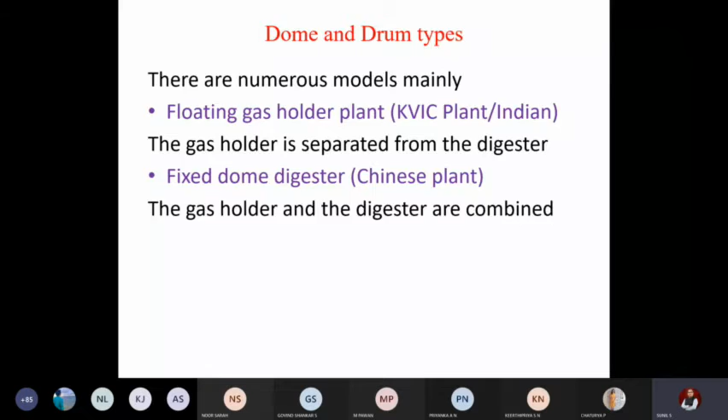So first we will start with the Indian design, also called floating drum. Take down a sketch. In most question papers, either Indian, Chinese, or single double stage, whatever we discussed, one question out of these three will definitely be there.

Please make it fast.

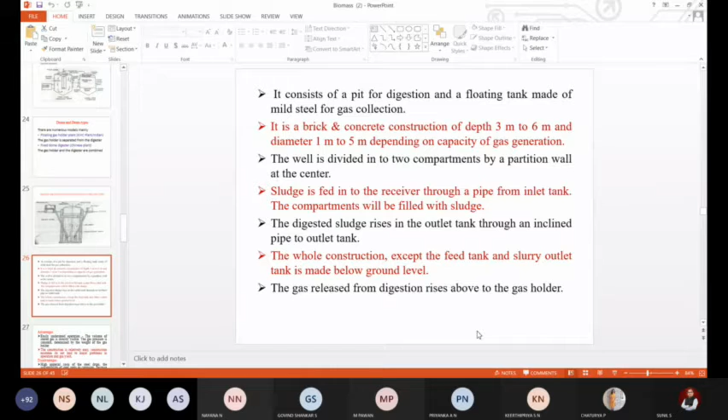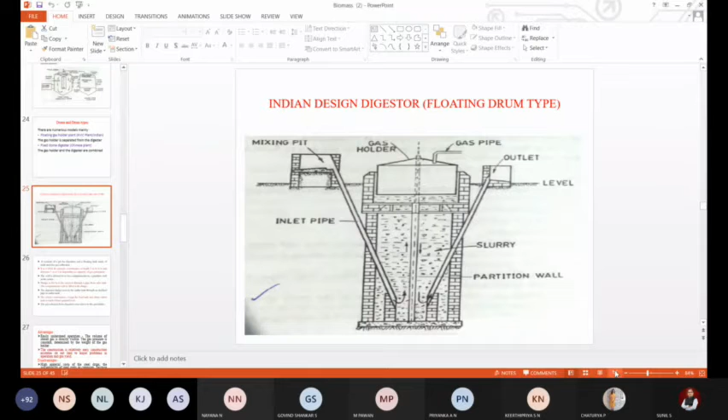So we'll start with the discussion. This is called the Indian design digester or floating drum type. Earlier, this design was very popular in India.

This is the mixing pit or the inlet pit, and this is the inlet pipe through which all the waste, sludge, slurry, etc. will be fed. This part is the inlet portion of the digester. All of this is brick construction. This is the second partition of the digester, and this part is the first partition, into which all the raw materials are fed.

It may be cow dung or any other crop residue, human waste, animal waste, domestic waste, etc., all fed along with suitable proportions of water, forming a slurry here. Over time, it gets digested. In the process of digestion, we have discussed the four sets of reactions that take place.

As the digestion process progresses, gas will be released and starts collecting in this drum, usually mild steel or another metal drum. As the gas starts filling, it will start floating, indicating the digestion process is getting completed. As digestion progresses, the slurry density reduces, so fresh slurry entering here, as shown by this arrow, pushes the digested slurry up so that it moves to the second compartment.

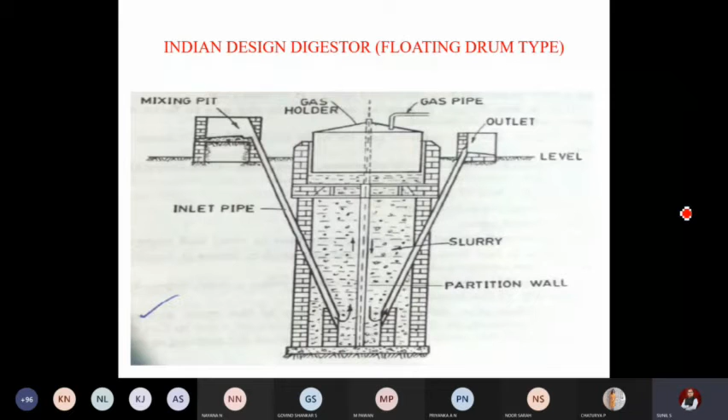I think it is done. I have explained you the same topic here. So what are the advantages of this Indian design?

You can easily understand the principle of operation. The volume of stored gas is directly visible as the drum floats. Based on the height, you can calculate the amount of gas stored. Gas pressure will be usually constant, determined by the weight of the gas holder. You will get a constant pressure.

The construction is easy. Construction mistakes do not lead to major problems. Even if there is a little bit of deviation in construction, you will first have a design of the digester. If there is a little bit of deviation, there will be no harm to the gas yield or operation. It's a simple construction.

The limitation is the material cost. Why? Because the digester, as we saw, is a masonry construction and can be built cheaply, but the steel drum usually has to be stainless steel, which is a very costly process. Also, this floating drum has a lesser life, and maintenance cost will be more. That is the only disadvantage we can see.

So these are the advantages and the limitations of the Indian design digester. Please make a note of it.

This Indian design digester is also called the KVIC model, Khadi and Village Industries Commission. So either it is called floating drum type, Indian design digester, or KVIC model, all three mean the same.

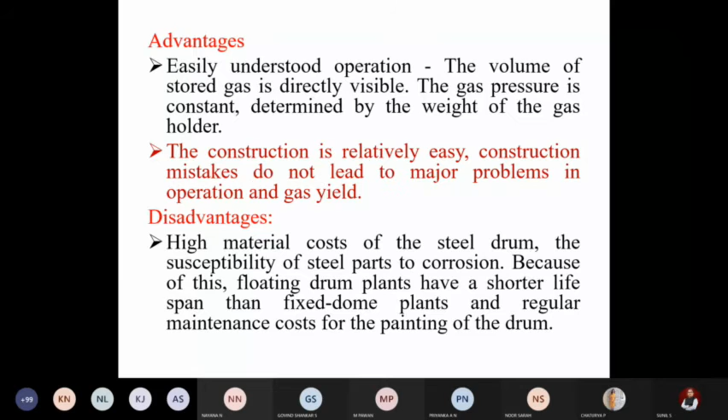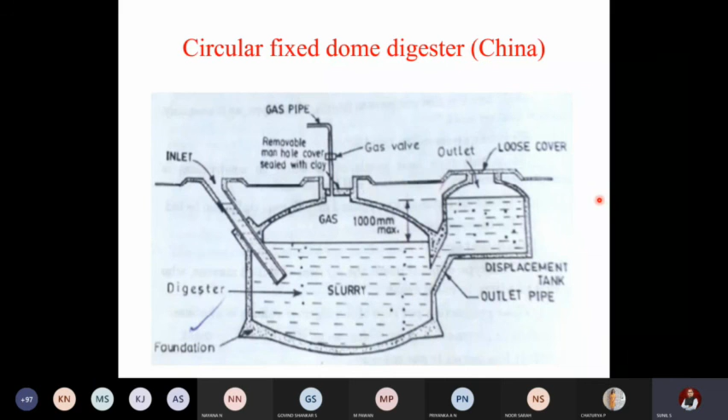So I have discussed all these points, construction, working, etc. Once again, we'll brush up on the advantages of this Janatha model. The first and foremost advantage is low initial cost and long useful lifespan. There are no moving parts.

Whenever there are moving parts, maintenance cost will be higher, and there are no rusting parts because the tank is also made of masonry brick construction. The basic design is very compact. It saves space, and for the same volume it gives more productivity as compared to the Indian design. And as I told you, local masons are more than enough.

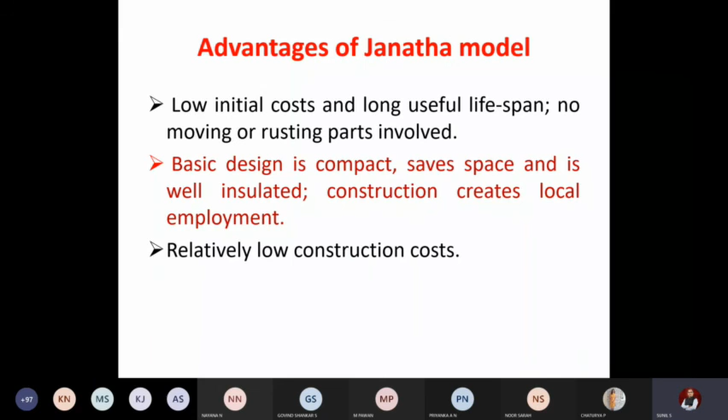You don't need any engineers or contractors for construction of the plant. So the cost of construction, maintenance, etc., will be very less, with relatively low construction cost. So what are the disadvantages of this Janatha or Chinese model? Masonry gas holders require special sealants. This is the toughest task.

Why? Because if it is a metal tank, it is easy to seal, easy to construct, easy to attach levers, pipelines, etc. Let me give you an example. An LPG gas cylinder is easy to handle because it is made of high grade metal and completely sealed. If it were built of masonry in your house and had to be refilled from time to time, it would be a tough task because leakage would be a very big problem.

Utmost care should be taken during construction, and wherever there are tappings, proper sealing should be done. Even with whatever care you take, over a period of time there will be leakage of gas. This is one of the disadvantages. The next disadvantage is the frequent problems with gas tightness of the brickwork. Whatever care is taken, leakage of gas will be there.

Fixed dome plants are therefore recommended only where construction can be supervised. Experienced gas technicians are required for maintenance. Every 6 months they have to come and detect any gas leakages, and those portions should be sealed. So these are some of the